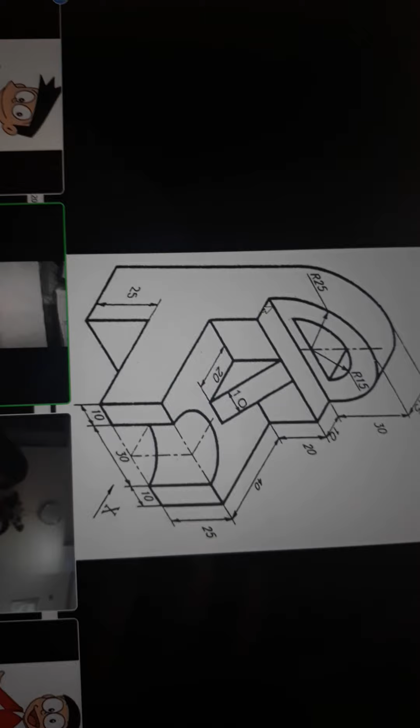Height they have given is 30, but the circular part is the radius 25. Can you see here? Yes. Yeah. So what is the common mistake? This 5 mm part will be straight over here. No? So everybody tries to join like this, and it joins somewhere here inside, because the circle will come inside. No, after 25, after semicircle.

So what you all have to do? See, this way it is 50. This way it is 65. 40 plus 10 plus 15, and height is 95. What, this height is 90, right? 95. Oh, sorry. 25 plus 25 plus 20 plus 30. 100. Height is 100.

See, 30. 30 plus 20, 50, 25 and 25. Height is 100. And this is 50. Okay. So this is 25. Go up 25 and come here. This is 25.

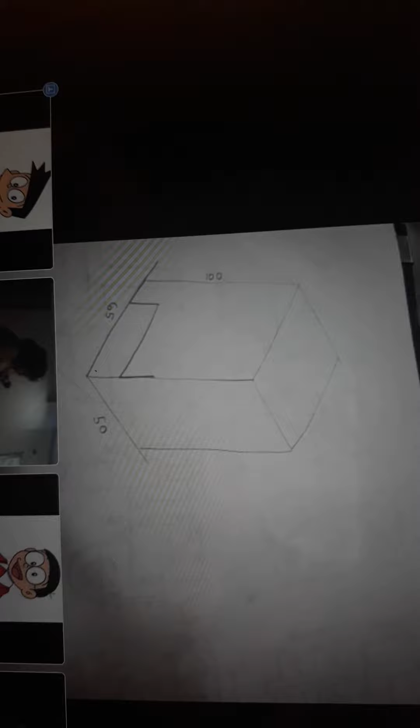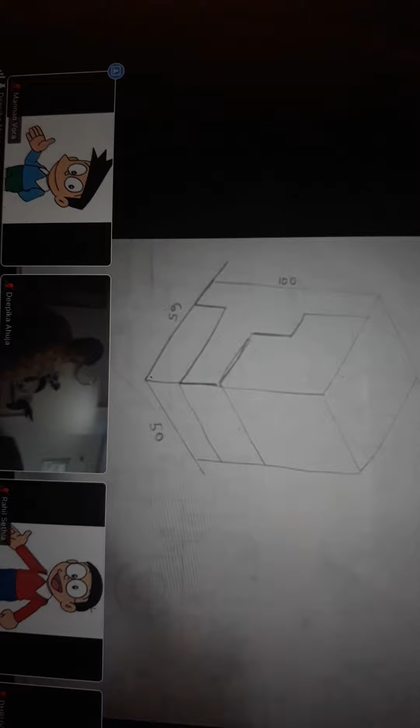Take this line here. Take this line here. Go behind 40. Go up 20. Come ahead 10. Go behind 10. And this is 15. Got the shape? Yes. Yeah. Now, bring this line here.

Come down. Bring this line here. Bring this line here. All these lines are 50 ahead. Come down. See, this is copy, so I'm going fast. So this is the shape. Now, here, always mark a midpoint and mark 15 this side, 15 this side. Then make the rectangles down.

Now, take this line 15 behind. Take this 15 behind, 15 ahead, 15 behind, 15 ahead. Longest diagonal, join this. Join this. With this center, you will get this part, and with this center, you will get this part. Now, shift this center down by 25, because this is 25, and this radius, make here. Got this part?

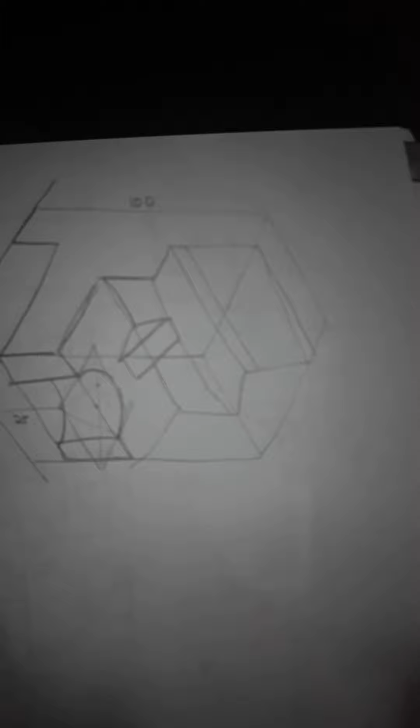Yes. So, you'll be able to do 20 here, go up 20 ahead, make this 10, 10, make it, and this is down. Now, the main thing what I want to teach you all is this. See, this is 30. At the height of 5, make a straight line first. At the height of 5, on this 5, mark 15 this side, 15 this side, make this part dark.

Again, 15 up, 15 down, 15 up, 15 down, complete the rhombus. So, this you can make, and with this center you can make this and this. Now for the outer circle, this is already 30. So just take 20 down. This is already 30. Just take 20 down and complete the rhombus over here. Longest diagonal, take a midpoint, join it.

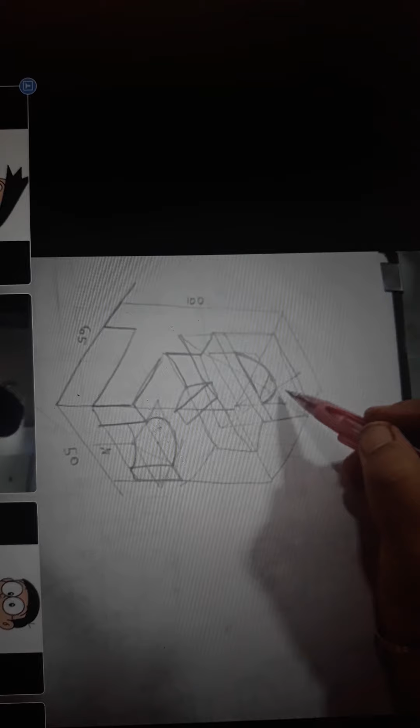Now your curve will come from here to here. This 5 mm part will be straight. If you will not make this straight, your curve will go inside. That will look wrong. And from this center up till here, this part 5 mm will be straight.

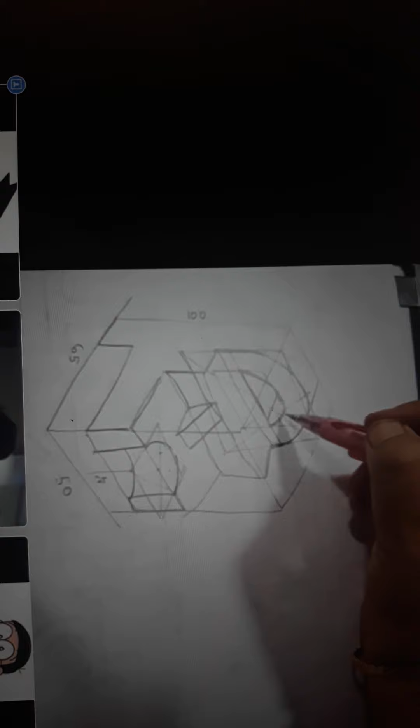Make a 10. Shift this center behind by 15 to get this part. Shift this center behind by 15 to get this part. And then this is down. This is inside. But I think copy ISO, everybody will be able to do it.